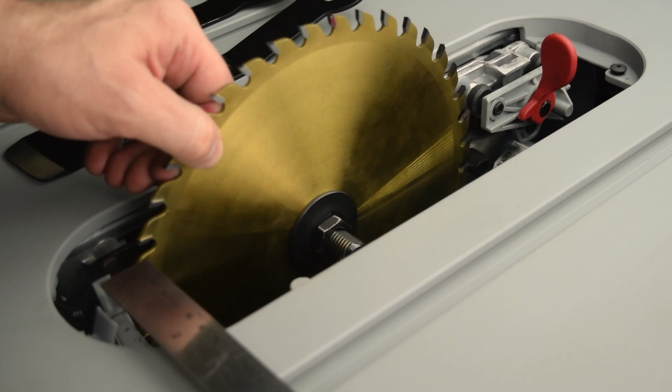This video shows you how to align the blade to the table for your SawStop Jobsite saw. The following procedure applies to both the Jobsite saw and the Jobsite Saw Pro. For this video, I'll refer to both saws generically as the Jobsite saw.

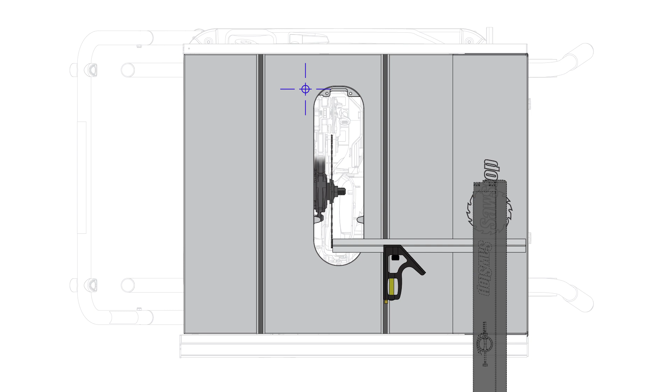For accurate cuts, the blade and miter slots should be parallel, within a certain tolerance. In addition to cross cuts that you make with the miter gauge, alignment is also important for rip cuts since the fence is aligned to the miter slot, which in turn is also referenced by the blade. The tolerance limit for the alignment is 0.010 of an inch.

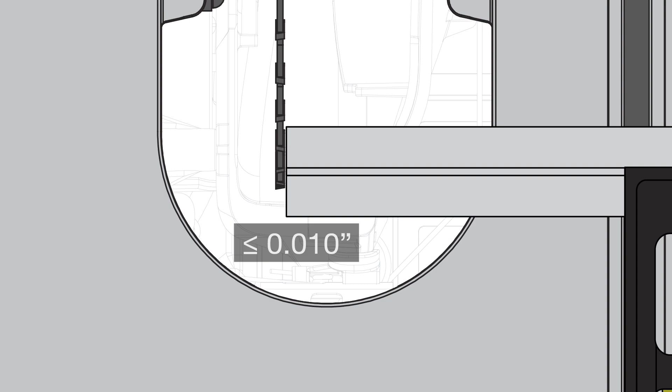This is the difference in runout between a tooth as measured when at the rear of the blade and that same tooth as measured when at the front of the blade.

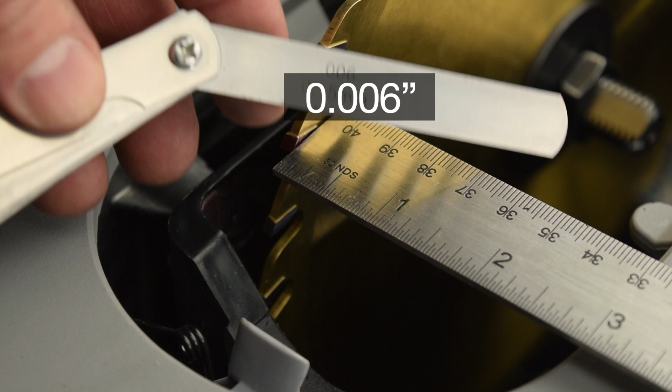If your Jobsite saw is within that tolerance, that's great. There's nothing to be gained by working through the alignment process. Further, if you're happy with the precision of the cuts for the particular work you're doing, again, there's no value in adjusting the blade alignment.

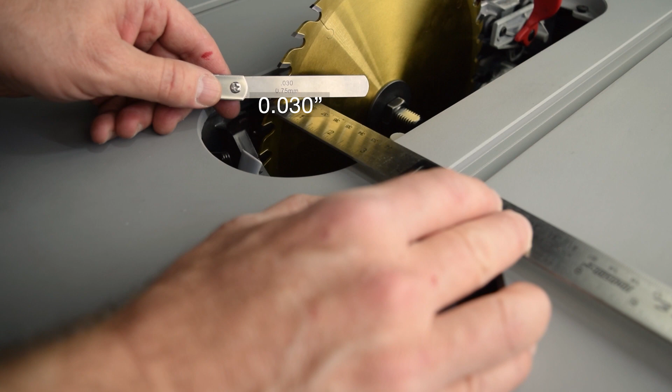If outside that tolerance or you are not satisfied with the precision of the cuts, use the following procedure to correct the alignment.

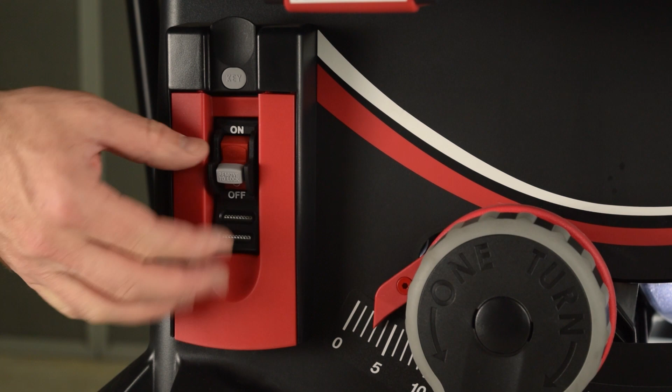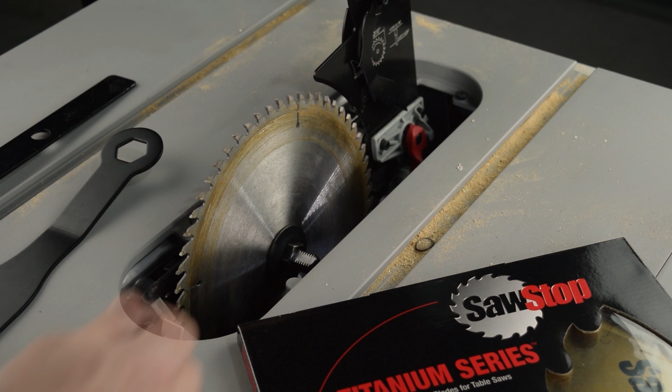To begin, turn off the saw and remove the lockout key. Unplug the saw. Remove the insert and blade guard, or riving knife. Set the blade to maximum elevation. Set the tilt to 0. Install a new and clean blade. Do not use a painted blade.

Make sure the right-hand miter slot is free of debris. Mark one of the teeth.

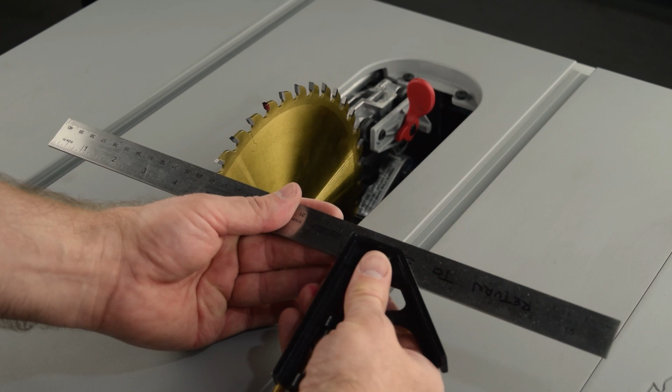Loosen the locking knob on the combination square and adjust the blade, or ruler, so that you begin with the end of the ruler well away from the tooth. I'll refer to the blade of the combination square as ruler to avoid confusion with the saw blade.

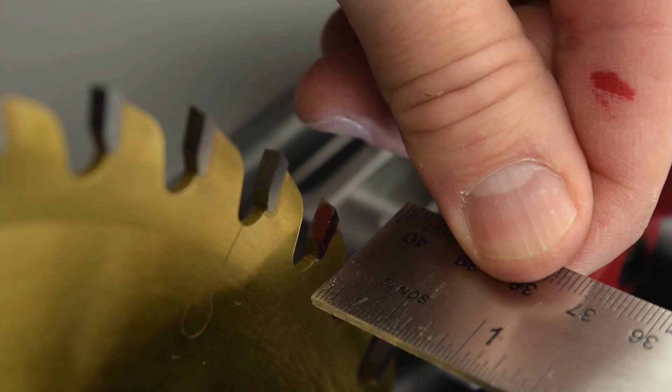Place the combination square in the miter slot at the back of the blade. Rotate the blade until the marked tooth aligns with the end of the ruler. Hold the anvil firmly against the side of the miter slot, and then slide the ruler so that it lightly touches the side of the marked tooth. Use a light touch on the ruler so you don't deflect the blade.

Tighten the locking knob. After all that, make sure the end of the ruler is still resting lightly against the side of the tooth.

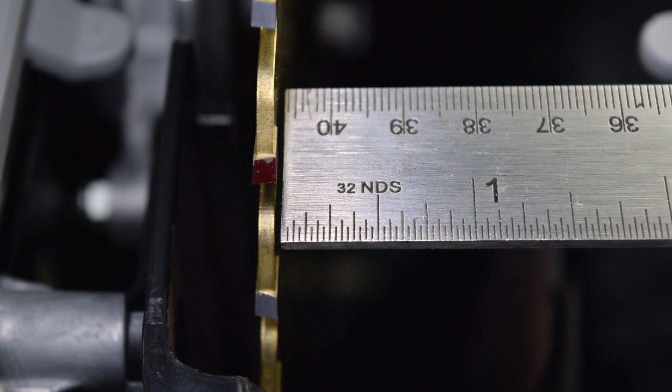Next, move the combination square to the front of the blade and rotate the blade so the marked tooth aligns with the end of the ruler once again. Visually check for a gap between the tooth and the end of the ruler, again holding the square firmly.

Use the feeler gauges to measure the gap. If more than 0.010 of an inch, the adjustment steps follow shortly. If 0.010 of an inch or less, you're good to go and no further work is required.

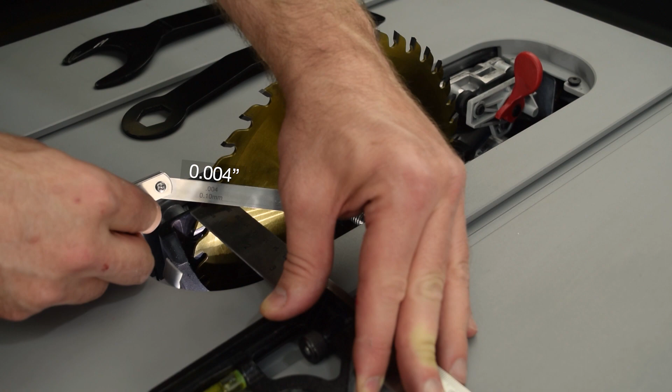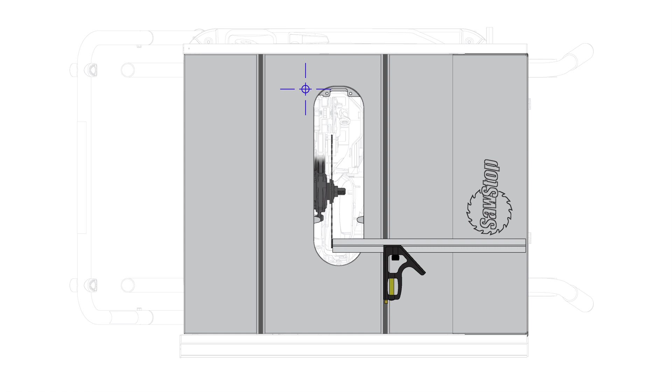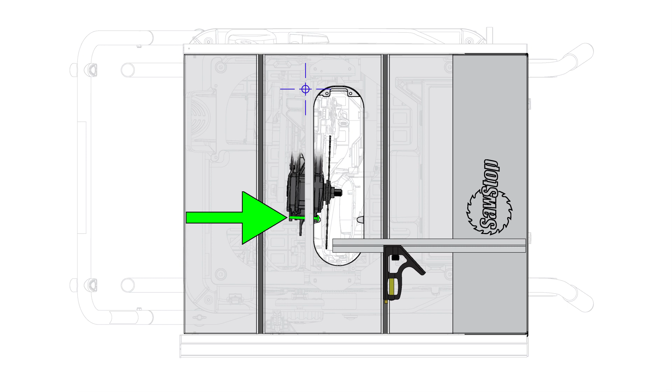In this particular example, the blade is out of alignment clockwise, with a gap when the combination square is at the front of the blade. In this case, you'd turn the arbor alignment screw counterclockwise to pivot the blade counterclockwise.

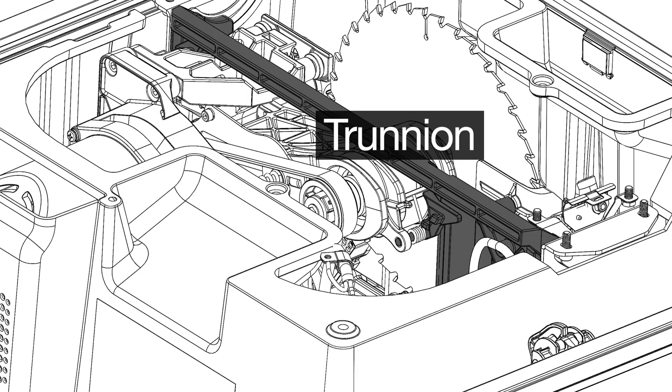For the Jobsite saw, the table is fixed to the cabinet, and the alignment mechanism pivots the blade relative to the table. The alignment screw is threaded through the alignment block, which is constrained against the trunnion. The screw, in conjunction with the lock nut, forces the arbor block and the elevation carriage to pivot on the elevation shaft.

To provide access to the alignment screw, you'll need to remove the blade. Remove the blade.

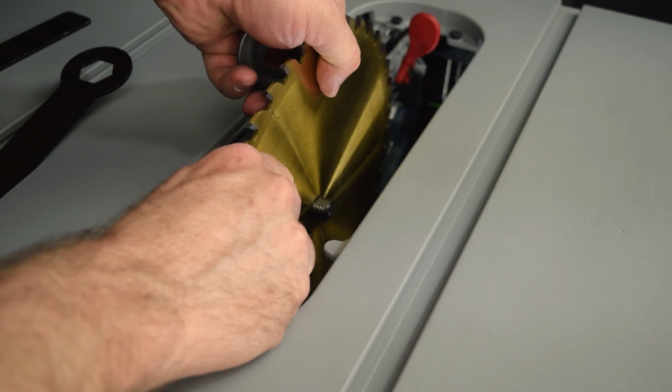Use the 10mm wrench to loosen the lock nut. Only loosen the lock nut just enough to allow the alignment screw to turn. Basically, you're just barely unseating the lock nut from the arbor block.

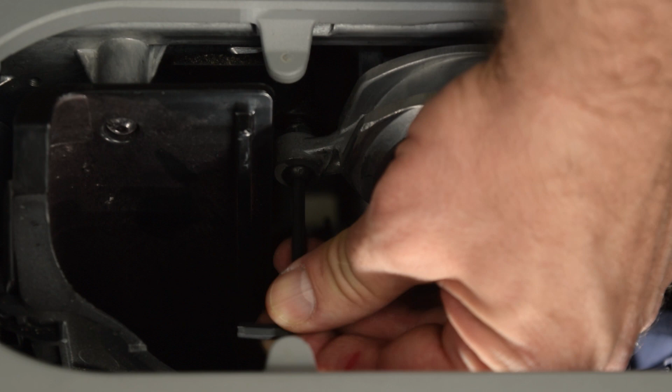Turn the alignment screw counterclockwise as looking from the right side of the saw. Here I'm using a shorter wrench so that it fits from side to side within the dust shroud. This permits a continuous turn without having to remove and reset the wrench for each turn. This should make it a little easier to track how much you've turned the wrench.

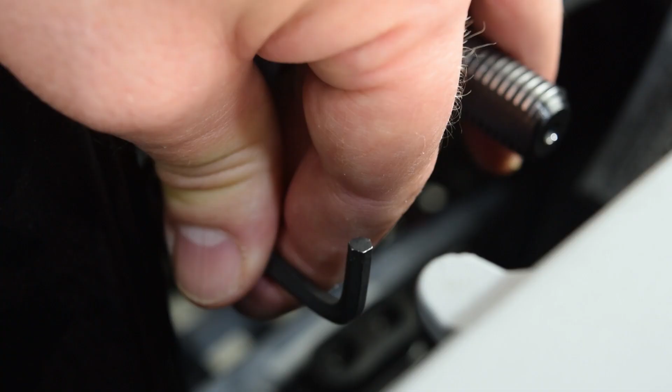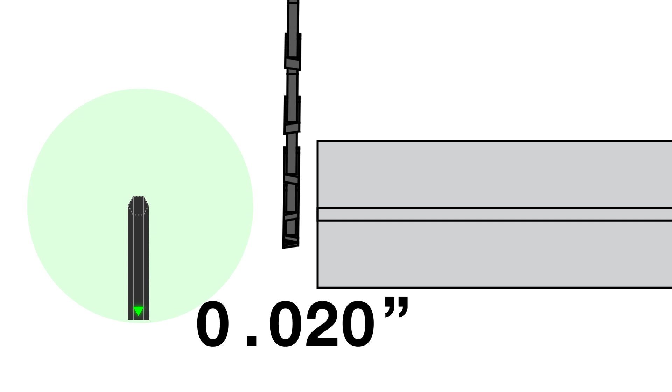To give a general idea of how much to turn the screw, a full turn yields approximately 40/1000 of an inch deflection at the front of the blade. In other words, if the gap were 20/1000 of an inch, you would turn the screw approximately just 1/4 turn to bring the gap under 10/1000. 1/2 turn would bring it close to 0.

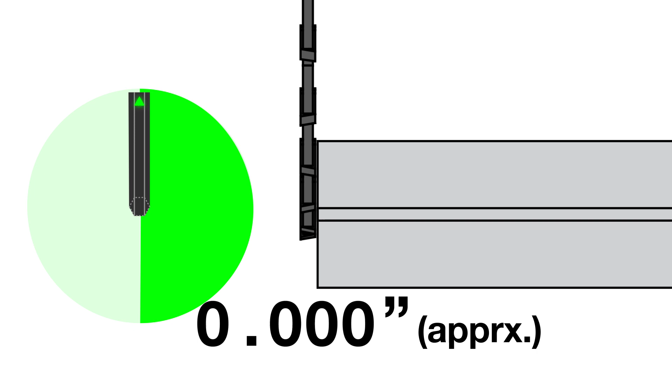If you look closely, you can also visually observe the arbor moving as you turn the alignment screw.

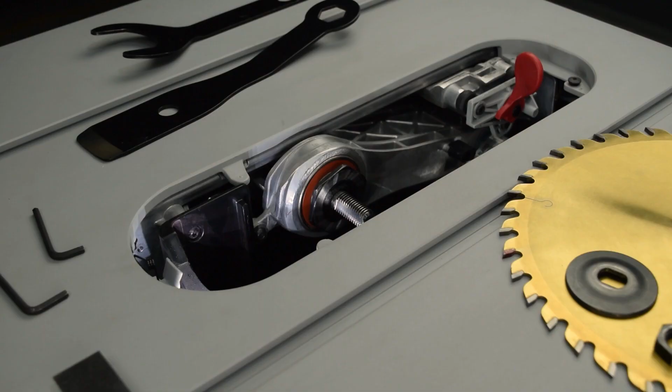After turning the alignment screw a calculated amount, install the blade and then check the alignment.

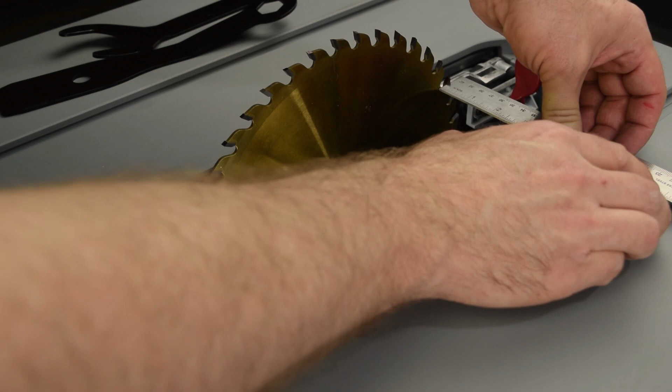If there is a gap, measure with the feeler gauges. If within tolerance, you're good to go, and you only need to tighten the lock nut to finish the alignment process. If still outside the tolerance, turn the alignment screw once again. Typically, you should only need small rotations of the screw.

If the blade is misaligned in the other direction, that is, the blade pushes the combination square away from the miter slot, or the end of the ruler bumps into the front of the tooth or the front face of the tooth, the blade is pivoted counterclockwise, and you would need to turn the alignment screw clockwise to pivot the blade clockwise back into alignment.

Once you're satisfied with the alignment, tighten the lock nut. Finally, confirm the alignment is still within tolerance after tightening the lock nut.

So that's it for the alignment procedure. Now you can perform the final steps to prepare the saw for operation.

Install the blade guard, or riving knife. Install the insert. Plug in the saw. Install the lockout key.